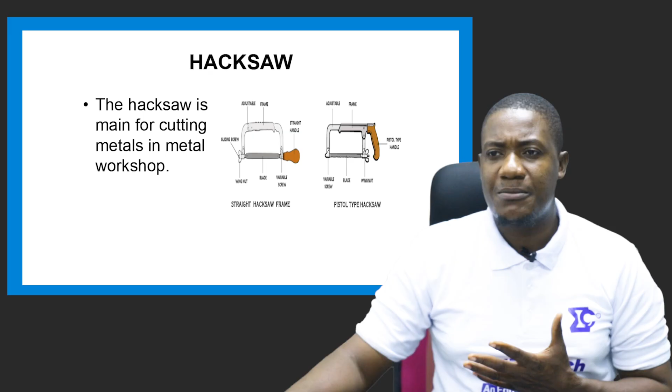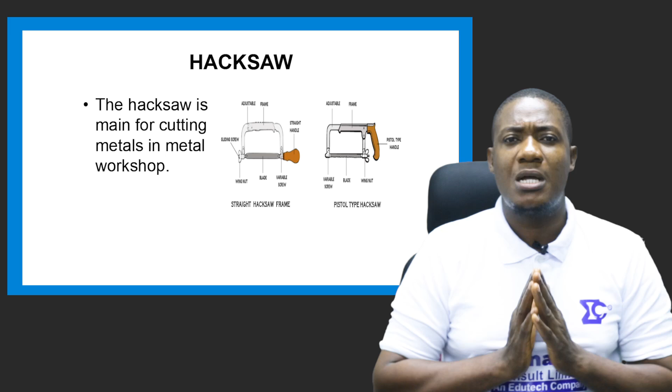So we have different parts of the hacksaw. It's important you take this into consideration, because in your basic examinations you are asked to tell what they are for. Now we have what we call the wing nut. The use of the wing nut is to tension the hacksaw blade, because from time to time you have to change the blade, when it's no longer sharp or the teeth are worn out. The wing nut puts the blade under tension so that you can work with it properly.

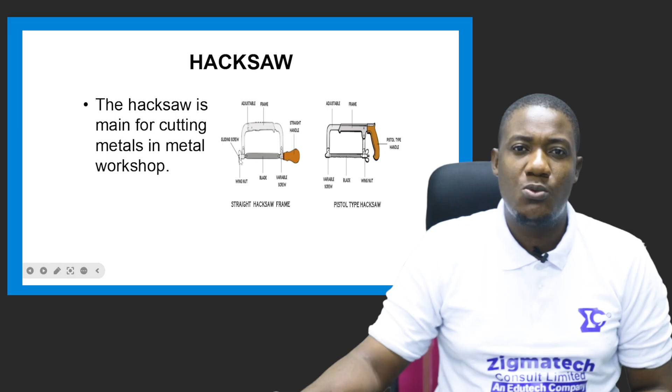Then we have the frame. We have these two types of hacksaw. This one is called the pistol hacksaw, while this one is called the straight hacksaw frame, depending on how the frame looks. This is the handle. It looks like a pistol. We also have the wing nut here, and the blade. We also have this variable screw. The frame is also adjustable depending on the length of the blade that is available in the market.

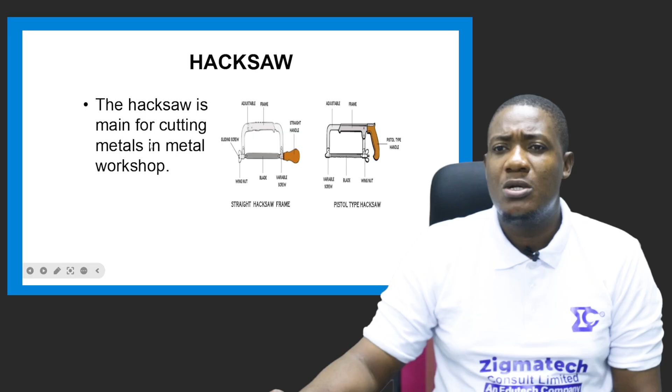Now, we have types of hacksaw. We have the adjustable hacksaw, the tubular hacksaw, and the junior hacksaw, right? Now, the junior hacksaw here, basically, we use it for cutting sheets of metal, just not a wider one because of the way it is.

What we cannot use the adjustable hacksaw to do, we cannot use it to cut sheets of metal, but this one can be used to cut sheets of metal. Now, the tubular hacksaw also, just as the name implies, can also be used for cutting rods. If you are not careful, you won't be able to differentiate between a tubular hacksaw and the adjustable hacksaw. Okay.

Now, we also have another cutting tool we call files. The file basically is used for finishing jobs. Let's say you want to smoothen some surfaces of the metal, you can use a file. Or maybe you want to file certain metal into its place so that you can form the shape you want to form, right? We'll use a file for such purpose.

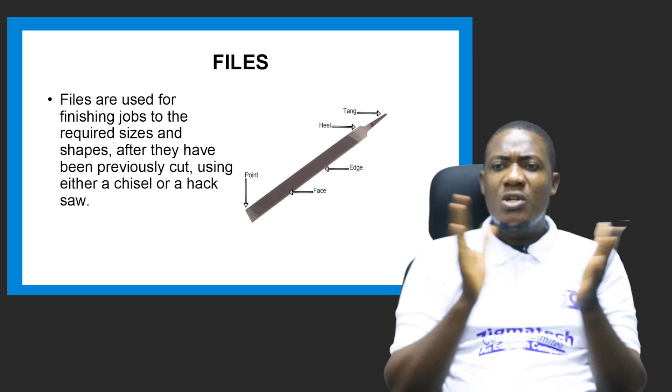Okay, now let's say you have cut the metal, or maybe you have used a chisel or hacksaw on the metal and you want that place to be smoothened or be in a shape that you want. You can use a file on such surfaces of the metal. Okay, so there are different parts of a file, and we have different types of files and what they are used for. Of course, this is a typical example of a flat file.

We call this the face of the file. This is the tang of the file. This is the heel of the file. This tang, let's say we want to put this file in a wooden handle so that we can easily work with it. We put the tang inside the wooden handle. Then we have this we call the safe edge of the file. So we also have here the point of the file.

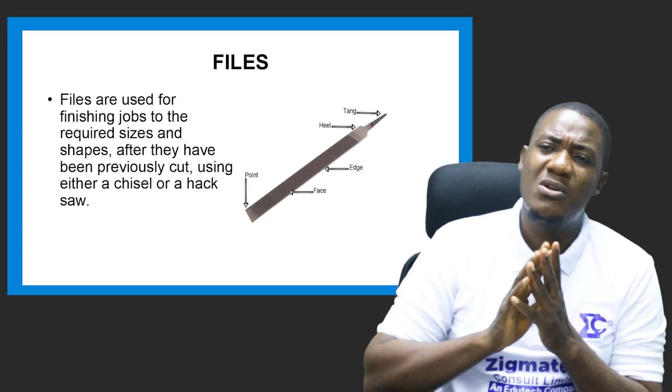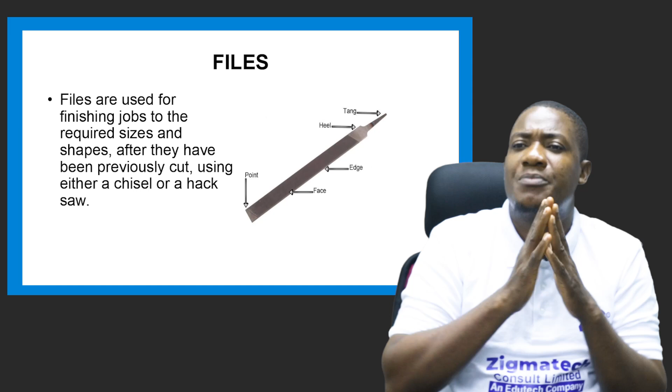When you want to work with the file, there are certain techniques that you need to acquire. You don't just use the file, especially when you're using it to sharpen your cutlass, or for other purposes. There are certain things you should not do, because this is very sharp. We have them in different grades depending on what we want. If it slips and you are not careful, it can cause serious injury on your hand. So when working with files, please take the requisite precautions.

We can classify files based on their length. We can classify files based on their cross sections, depending on the way it is. We can classify them based on their shape, what they look like. Are they round in their shape? Then we call them round files. Are they flat? We call them flat files. You see that? Do they have a triangular cutting edge? We say it's a triangular file. So we can classify files based on the shape.

We can also classify them based on their grades. We have different grades of file. We have the grade of file we call the bastard grade. We're going to look at it. The name actually is funny. All right. We also can classify files based on the area of cut and the cutting teeth of the file. Now, these are different grades of file that we have and what they are used for.

We have the coarse grade. Okay, we use this coarse grade for heavy cuts in metals. When we need heavy cuts in metal, we'll use the coarse grade of the file. The bastard grade is used for medium cuts, where the metal is not that heavy and needs a medium cut on it. But we also have the second cut grade. All right, this second cut is used for light cuts.

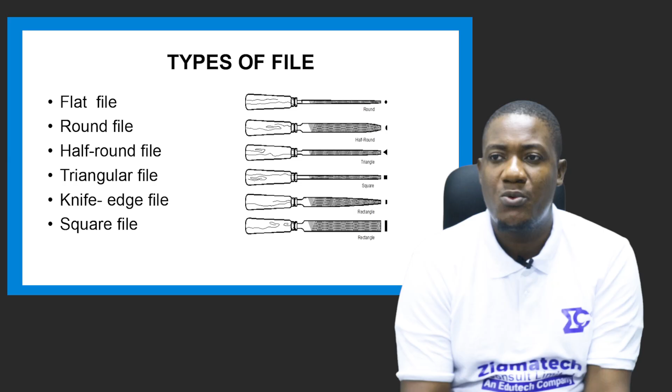Okay, there are different types of files. This one is based on their shape. We have a file called the flat file. The flat file can be used to form a flat surface on a material. We have the round file.

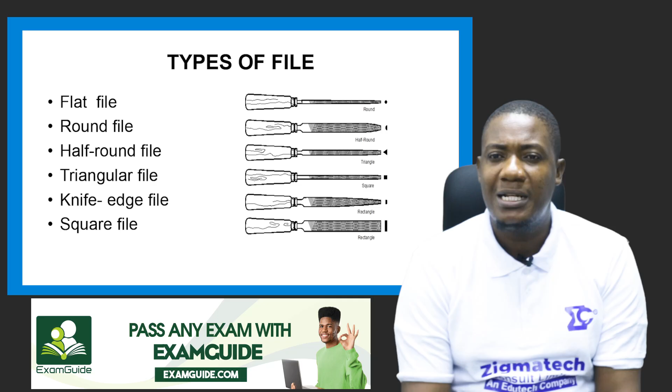There. We have the half round file. We also have the triangular file. The triangular file, you see there, can be used to form a dovetail in a workpiece. We also have the knife edge file. We have the square file. Just as the name implies, we have the square file. Okay, the edge here looks more like a square, you see that? It looks more like a square.

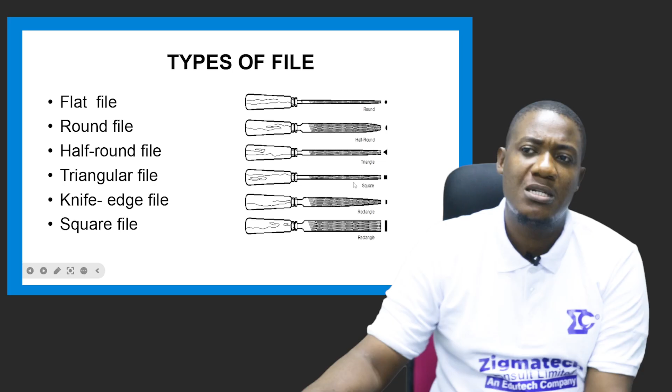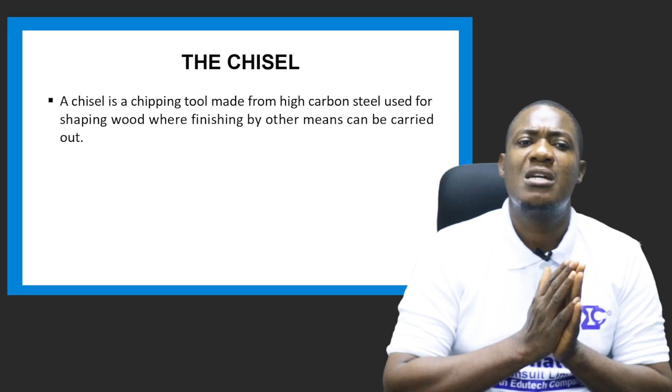Okay, now we have another cutting tool we call the chisel. The chisel here is a cutting tool, just like I said, made from a high carbon steel. We use them for shaping metal, all right? For example, if we have to scrape some parts of the metal that are not entering, we can chisel the metal out. Or let's say when you cut a metal and some part refuses to cut out, you can chisel it out. You can chisel out some part of the metal, then it enters to what you want to actually fabricate.

We have different types of chisel. We have the flat nose chisel, the flat chisel. We have the cross-cut chisel. We also have another chisel we call the round nose chisel, and the diamond chisel. These are just their names. They are just a result of the way they look and the kind of work they can do.

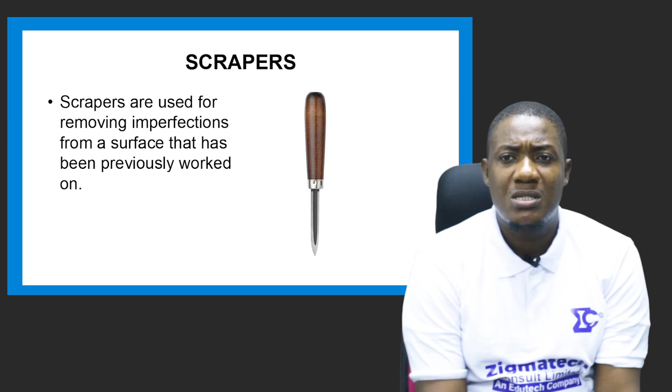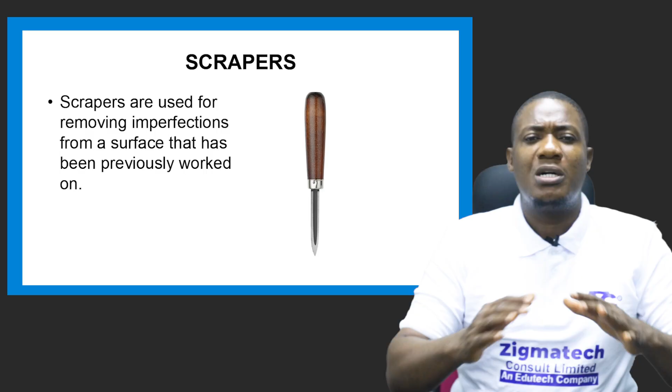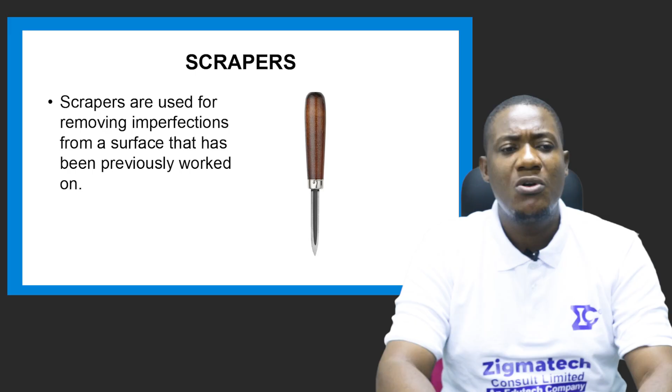Now we also have scrapers. Scraper, the name will tell you what it is used for. We use scrapers for removing imperfections from metal surfaces that have been worked on previously. Let's say maybe you are working on a gate, or a metallic box, for example a metallic safe, and there are certain areas that have pieces of metal that are not properly taken care of. You can use the scraper to actually scrape out the metal.

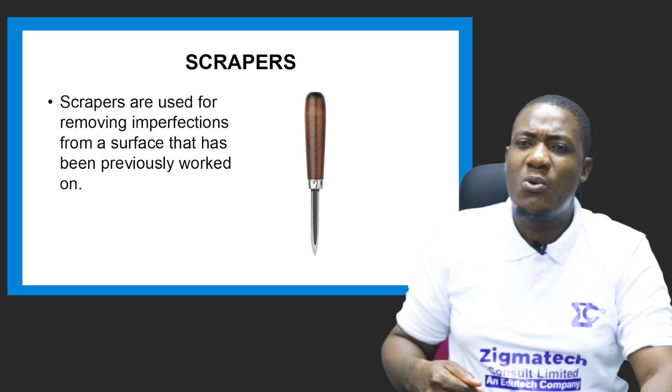We have different types of scrapers. We have the flat scraper. We also have the triangular scraper. The one you're seeing on the screen here is a triangular scraper. We have the half round scraper. They are used for the same purpose, depending on the nature of the place you wish to scrape. In some places the surfaces are not flat, so you may not be able to use a flat scraper, but you can use a triangular scraper to enter into grooves and holes to remove certain imperfections in these areas.

We also have other metal work hand tools. We classify them as driving tools because basically they are used for hammering, punching, and screw driving in metal work. When we mean hammering in metals, we're talking about making certain indentations on metals, or maybe strengthening the metal that you wish to work on.

Okay, now the hammer, for example, we have different types of hammer. We have the ball peen hammer, the cross peen hammer, and the straight peen hammer. These are the three types of hammer. We also have another special type of hammer that we call the mallet, used for metal work. But for now, we will talk about the ball peen hammer, the cross peen hammer, and the straight peen hammer.

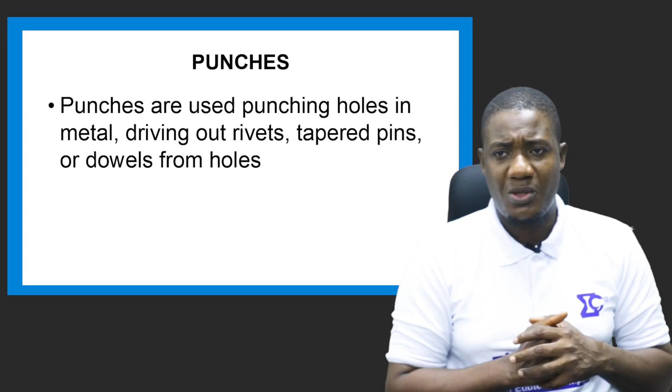Now, punches basically, they are used for punching holes in metals. They can also be used for removing or driving out rivets or tapered pins or dowels from holes. Rivets, like we are talking about here, they are just mechanical fasteners. So maybe you have used rivets to fasten two metals and you wish to remove it. Let's say it is in a hole where ordinarily your hand will not get to. So you need a punch like the pin punch to get to that place and remove the rivet from there. Okay?

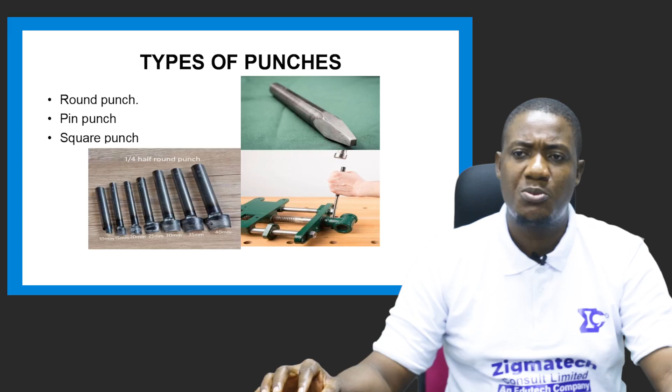Then we have the square punch. We also have the round punch. Let's say you're also working on a metal work and maybe a rivet gets stuck in the process, and that place is where the round punch can get to. You can use it for such purpose and remove the tapered metals in those places.

Okay, now we also have another driving tool we call the screwdriver. You know that we can also use screws to fasten metals. But for us to do that, we need screwdrivers to actually drive these screws into the metal. So screwdrivers basically are used for driving screws into the metal. Let's say you want to fasten two metals. Oftentimes, panel beaters make use of screws a lot. Okay?

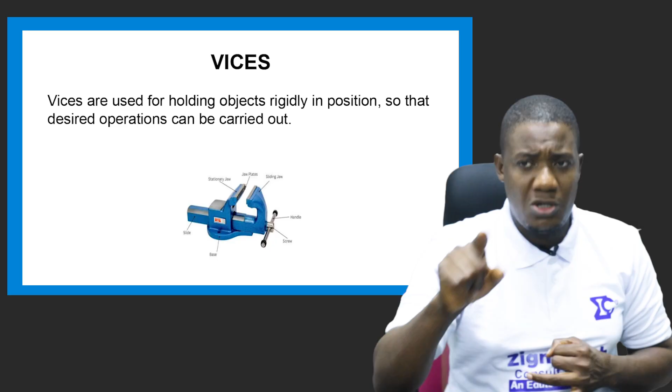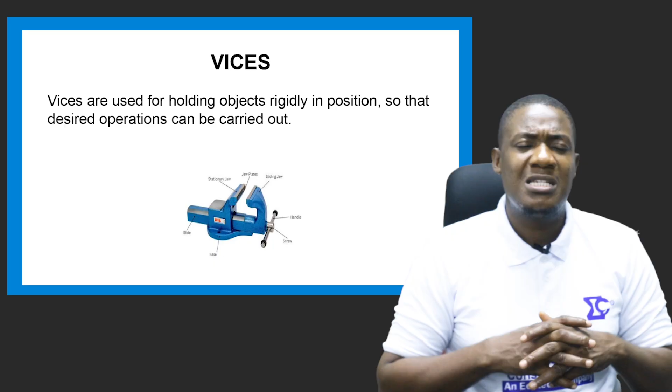All right? This is very, very important because if you want to cut the workpiece, you have to use the vice to hold it firmly so that you can cut the metal. Let's say you are using a hacksaw, for example. You need the vice to do that. All right, vices basically are used for holding objects rigidly in positions so that the operations we wish to carry out on the object can be carried out successfully and without much stress.

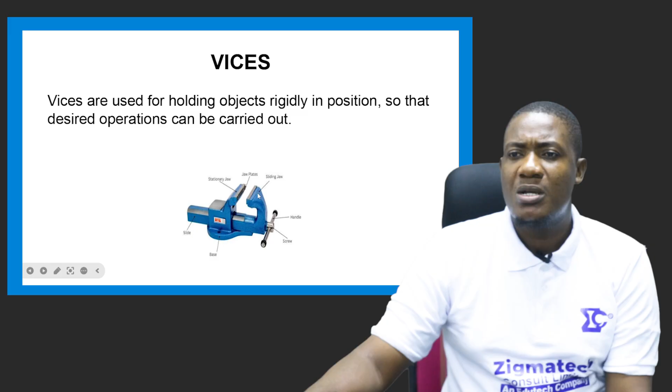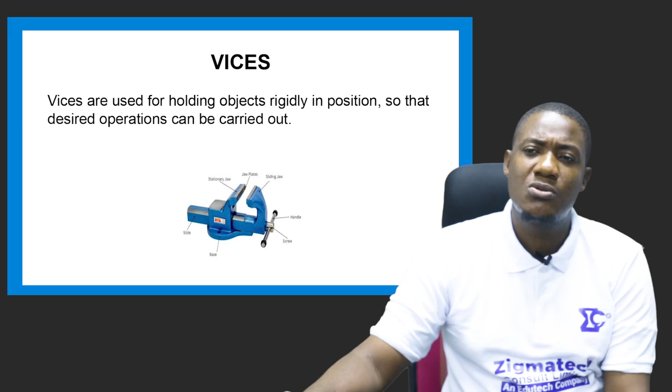The vice has different parts. Some parts are movable, while some parts are actually fixed. The vice has two jaws. When you turn the spindle using this screw, the spindle can slide this way depending on what you want. Let's say you want to hold a workpiece, you need to just turn it in the clockwise direction. Once that is done, this slide or spindle moves in this direction.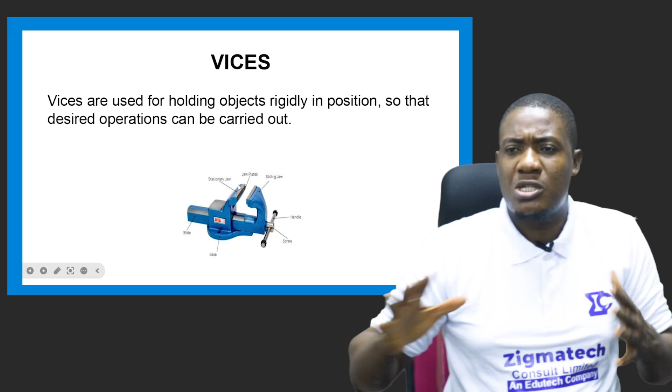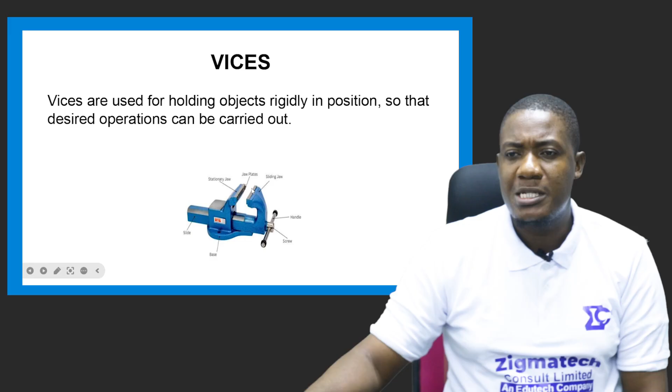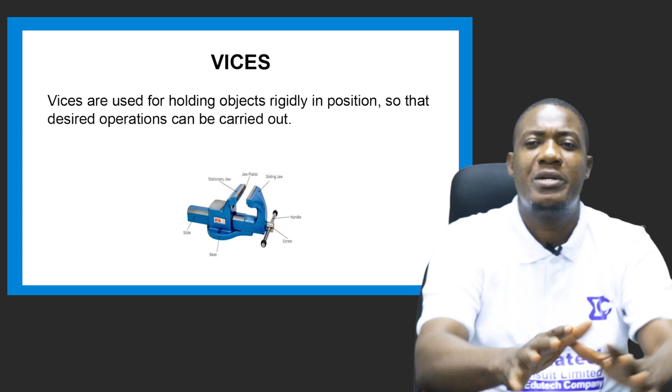Then the jaws will actually hold the workpiece that you wish to work on, and then you do what you want to do. This other jaw here is stationary. We have the base of the vice where you can actually fix it either on the metal workbench or on a separate metal stool to be used for such purpose.

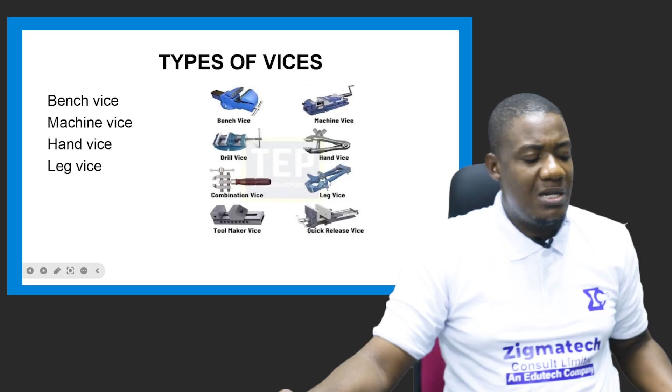Now, we have different types of vices. We have a vice we call the bench vice, the one that I've shown you. We have the hand vice. You are seeing it here. We have the machine vice. We have the leg vice. This one is fixed maybe at the leg of the workbench, and you use it to hold what you want to hold. So if you are not careful, you will think it does the same function as the clamp, but it's not actually what it does.

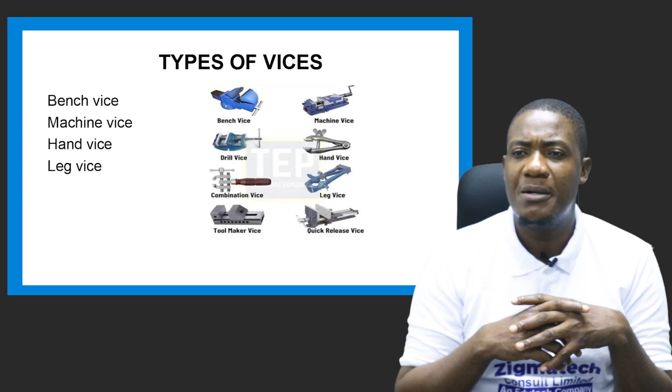Then we also have the tool makers vice. We have the combination vice. We also have the quick release vice. All of them are used for the purpose of holding a workpiece that we actually want to drill, cut, or maybe shape. That's what they are used for, depending on the precision of your work.

And then pliers. This may be your first time to know that a plier is actually a clamp. Plier is a clamp. You can use it to hold your work. You can see it in many fabrication sites. Maybe the welder wants to join two pieces of metal together. You can use it to hold them, and then do your work with ease.

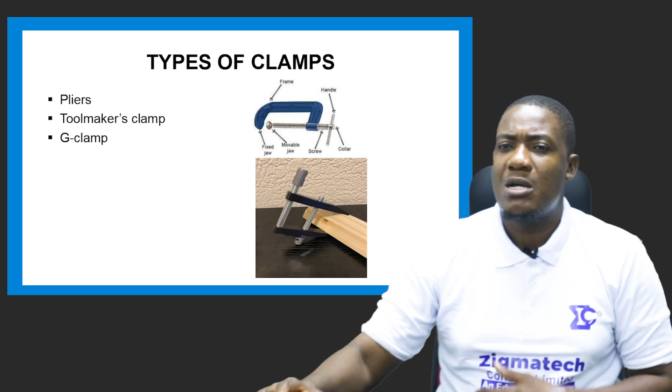So the G clamp basically is used to clamp the material on a bench, and then anything you want to hold, you can actually hold together. You can see the tool makers clamp there in use, the way it's being used for holding materials that we wish to work on. Okay, we want to actually talk about pliers. Pliers are actually general purpose holding tools. We use pliers for different purposes, and we have different types of pliers depending on what you want to use them for.

The combination plier is the one that is almost everywhere. Every technologist has this, because you can use it for different purposes. You can use it for cutting. Yes, you can use that one to cut even pieces of metal, like for example wire. You can use that plier to cut. You can use it as your holding tool too. That's why it is called combination plier. It's a combination of different things it can do.